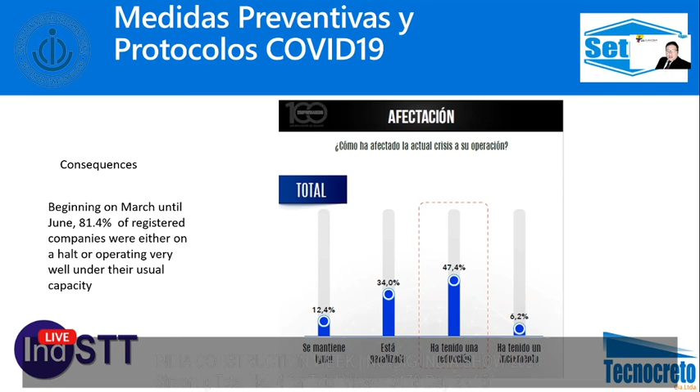In this chart, you can see how quarantine really began in March and moved forward all the way to June. We can see data showing that at least 80% of companies were not operational, or not operating at their normal capacity. Construction and service industries are the most affected sectors, especially those with less than 200 employees. This meant that too many businesses were dangerously at risk of closing down, and we needed to take action to adapt and survive.

Sales plummeted to under 40% for at least over half of the still active companies. Projections forecast that it would take around 4 months for companies to reestablish some ground and finally return to a usual level of activities.

It is clear now, around December, that this crisis still prevails and will continue for at least another 5 to 6 months ahead.

Once our government authorized some industry sectors to progressively reopen their activities under strict sanitary protocols, the construction sector was the first to be set in line for reactivation, when it began in July.

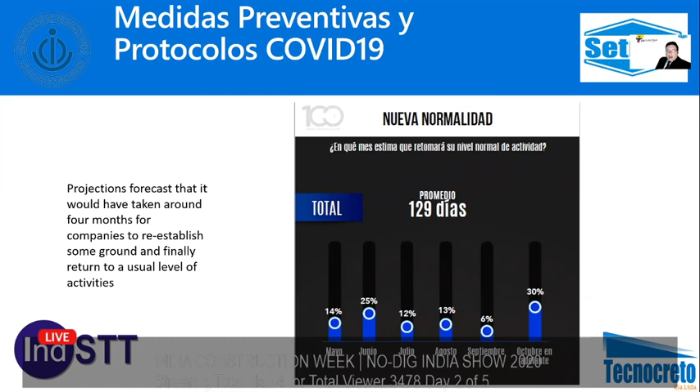With this, we began to think about what to do now. How are we going to achieve the objective of reactivating ourselves and maintaining some level of operations under this situation? Data was showing us that most companies didn't want to consider closing down as an option, and neither did we. Critical measures needed to be implemented, combined with administrative decisions based on government limitations.

Once again, data showed us that we needed to be resilient, adapting to the situation, redesigning ourselves, and in that way we might be able to resist this crisis.

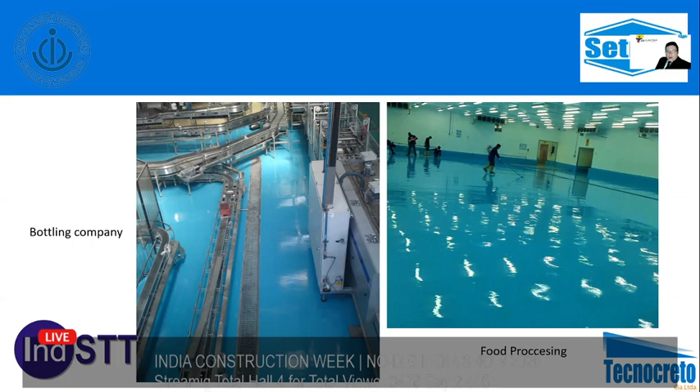Right here, we have a good look at what these industries might expect of properly protective concrete surfaces. All things considered, we at Setmix decided that the right approach might be to get to these industries and offer them protective coating systems that, when acquired, might lead to other needs such as concrete repair and concrete reinforcement.

Reasons for concrete protection we have as follows: protective lining or barrier coatings against chemical and mechanical deterioration, waterproofing, damp proofing, and freeze-thaw cycle protection, enhancing surface functionality, reflectivity, aesthetics, and thermal resistance or improved reflective properties.

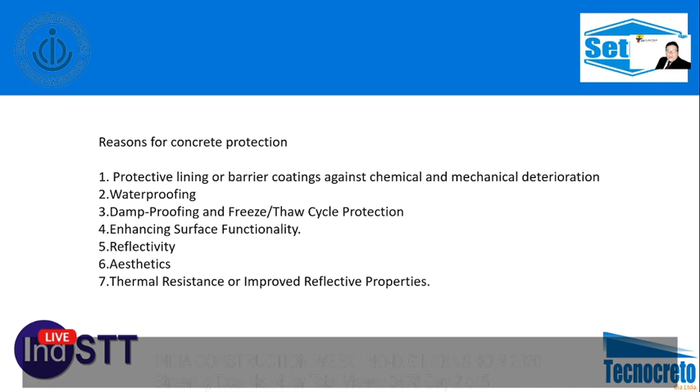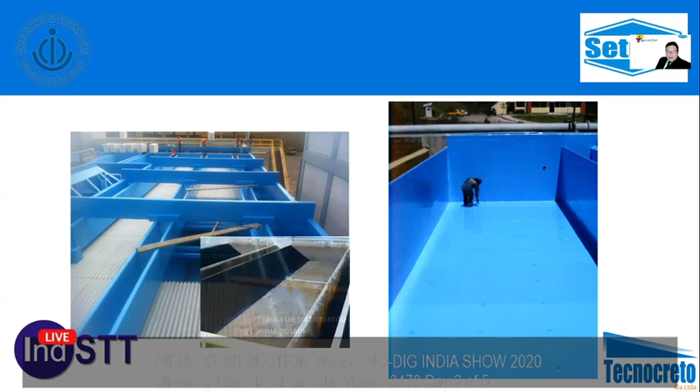As expected, once we offer the owner some concrete protection systems, the need to do some concrete repair and or reinforcement usually comes along. As you can see, when we finally apply coatings as shown here, there's usually also the need to do some previous repairs and in some cases, some reinforcement too.

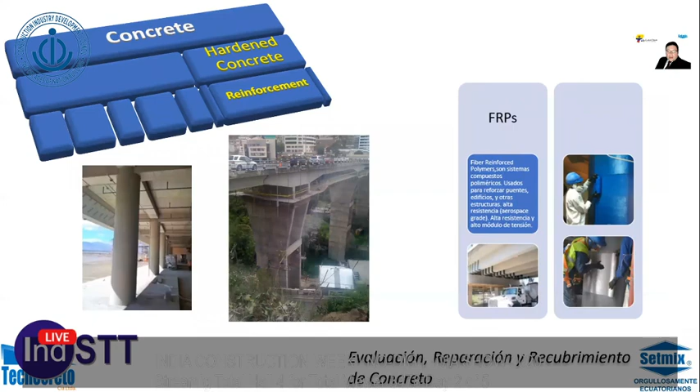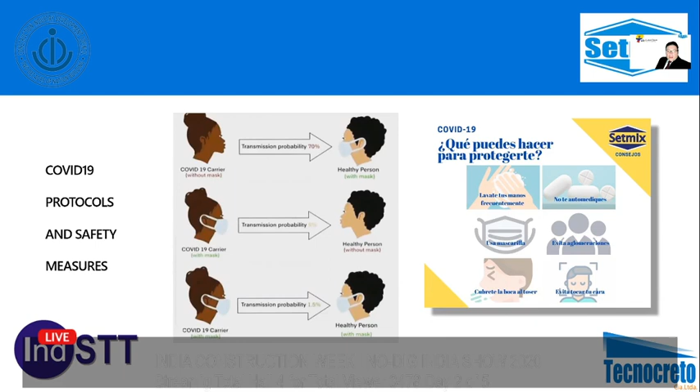One important thing to get this strategy started and running was to always reflect to our clients that we are consciously minded to follow safety protocols and keep everybody safe, healthy, and free of a COVID infection. We then resumed our activities right after finishing our requirements on training for our personnel on COVID safety protocols. We need to wear masks, wash our hands, avoid touching others, and avoid touching your own face. Keeping the recommended distance of 2 meters away should always be followed.

It was then that projects did finally begin as shown here at these client facilities, going through surface preparation, priming, repairs, joints, surfacing, and finally, top coat application.

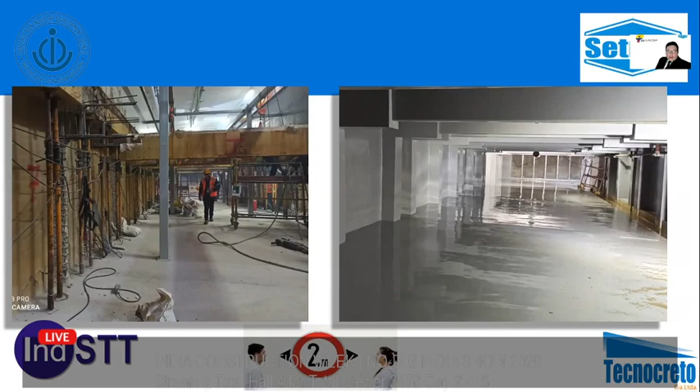Here is a list of some guides and standards that should be followed during the installation of protective coatings at any project to achieve best results.

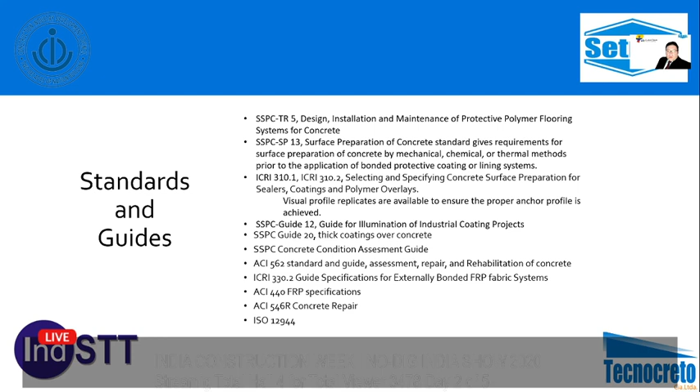Finally, keep in mind that there are two types of base specifications as a starting point. One is for new construction projects and the other for repair and maintenance of existing projects.

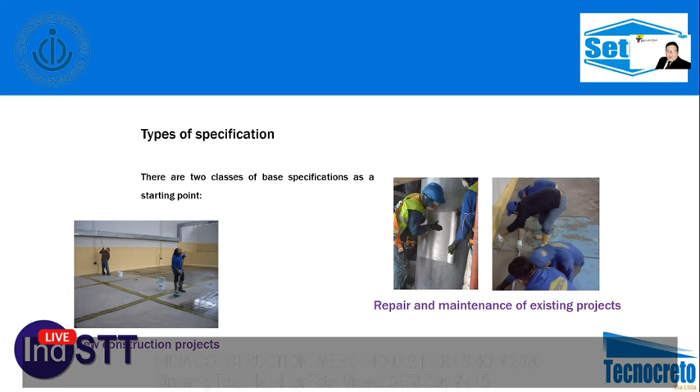To conclude, adequate system selection for concrete protection, as specified, shall be achieved by meeting technical requirements based on use, environment, and durability. The specification shall be created and designed by an experienced certified professional in coatings protection, and technical criteria shall always prevail over any sales point of view.

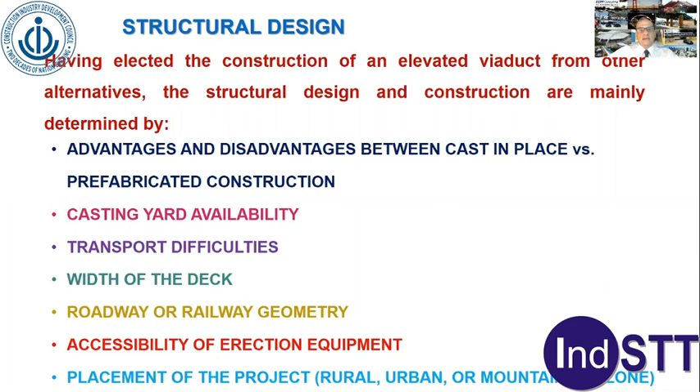Structural design. Having elected the construction of an elevated viaduct from other alternatives, the structural design and construction are mainly determined by advantages and disadvantages between casting in place versus prefabricated construction, casting yard availability, transport difficulties, width of the deck, roadway or railway geometry, accessibility of erection equipment, and placement of the project in rural, urban, or mountainous zones.

Piers and foundations. Piers, in general, rectangular or circular RC concrete columns, bents, RC or PT concrete caps, and two or more columns. Shallow foundations or group of piles, closed or open abutments.

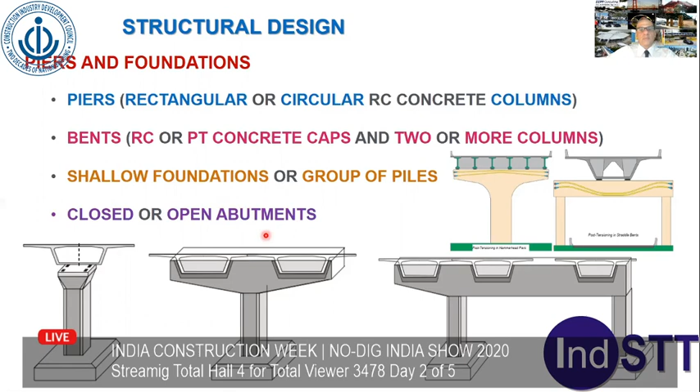Decks. Construction method. Between 30 meters up to 50 meters span length, precast systems, and between 70 meters up to 300 meters, cast in place methods. Static systems, continuous or simply supported. Main erection systems: full span, span by span, balanced cantilever, incremental launching, and progressive placement.

Main cross sections: U-girders, box girders, multiple I or U beams, plus cast in place or prefabricated deck slabs. Section depth, constant between 30 meters up to 60 meters span length, and variable between 70 meters up to 300 meters. Erection equipment: launching gantries, cranes, movable scaffolding, lifting frames, form travelers, and launching trusses.

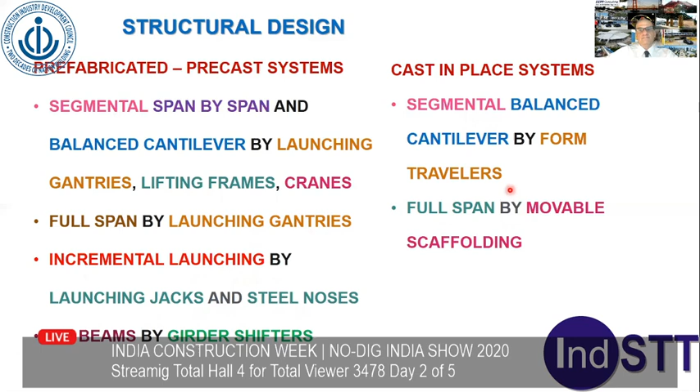Economical span length ranges for concrete bridges: slab or T up to 20 meters span length. I girders between 20 meters up to 50 meters. Incremental launching between 30 meters up to 60 meters.

Span by span system between 30 meters up to 50 meters. Balanced cantilever precast system between 40 meters up to 110 meters. And cast in place system between 70 meters up to 300 meters.

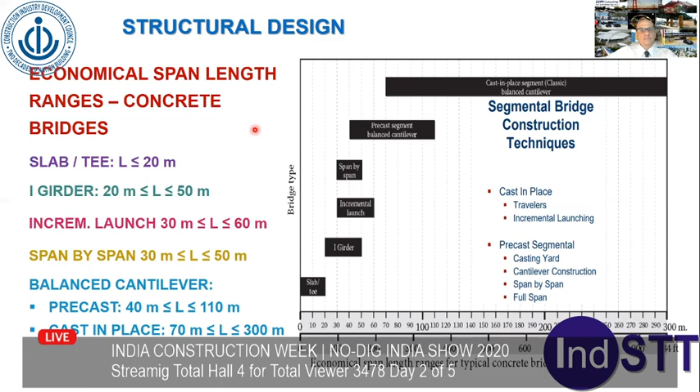Usual cross sections: unicellular box girder, U-girder in segments, U-beam plus cast in place or precast deck panels, and mixed concrete steel box girders plus cast in place slab or deck panels.

Composite action: single or double composite action.

Less usual cross sections: multicellular concrete box girders, all of this, when the width of the bridge needs to be high.

PT concrete box girder with corrugated or trusses steel webs: concrete upper slab, concrete bottom slab, and webs with corrugated steel or trusses.

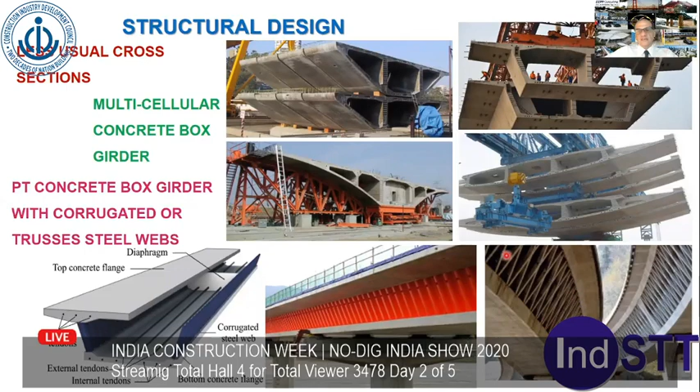Optimum span ranges for different cross sections for railway viaducts, ratios between span length and depth of the cross section: slabs, concrete box girders, mixed girders, steel sections, and simple or double mixed actions.

Cast in place concrete deck or prefabricated concrete deck, U-beams, and prefabricated decks or cast in place decks.

Some important details: balanced cantilever and continuity PT, shear keys, bottom continuity tendons, cantilever tendons, bottom PT bars, all of this for the cantilever system.

Span by span with external or mixed PT, mixed PT, external PT, for simple support or continuous systems.

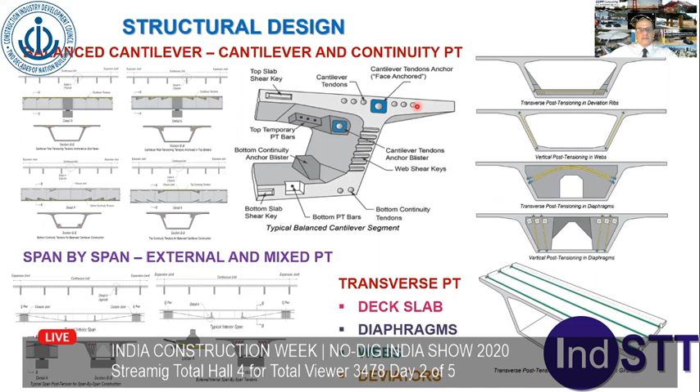And then transverse PT in deck slabs, diaphragms, webs, and deviators. These are the main construction details for balanced cantilever and span by span systems.

Construction: cast in place versus prefabrication. Precast segment erection: balanced cantilever erection with launching gantries, span by span erection with launching gantry, balanced cantilever erection with lifting frames, balanced cantilever erection with cranes, precast beam method, full span precast method, span by span erection on false works, and in situ construction: incremental launching and form traveler method.

Precast segments, launching gantry. Span by span with launching gantries, span length between 30 meters up to 50 meters.

Balanced cantilever with launching gantries. Segments, balanced cantilever, launching gantry, span length between 40 meters up to 110 meters.

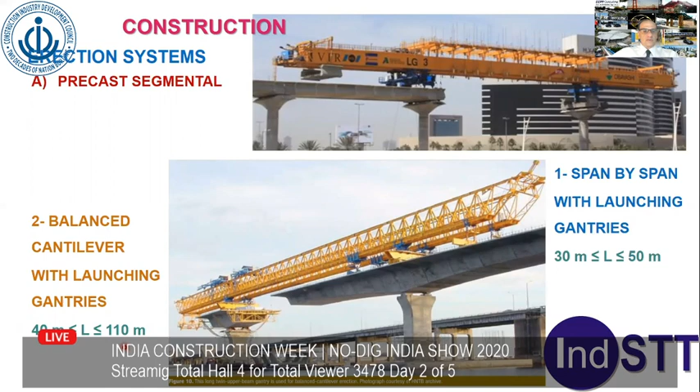Incremental launching with launching jacks and steel nose, span length between 30 meters up to 60 meters. And progressive placement of segments with cable stay system or temporary piers. All of them are segmental systems.

Precast full span with launching gantries, span length between 20 meters up to 50 meters. U-girders, box girders.

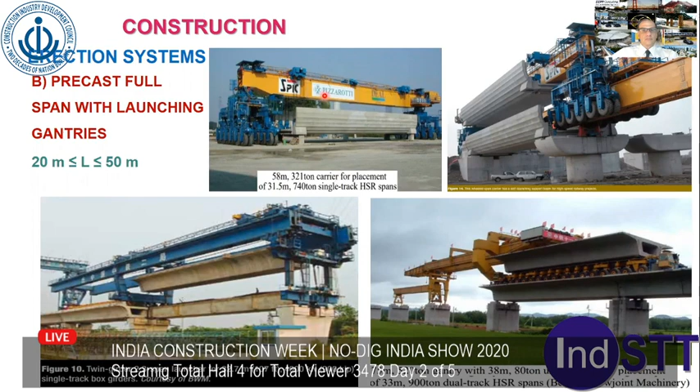Cast in place segmental with form travelers, usually used in balanced cantilever method, between 70 meters up to 300 meters span length.

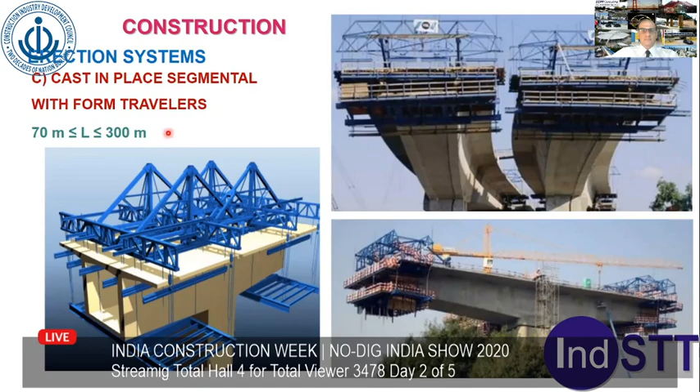Cast in place full span with movable scaffolding system, this machine. This overhead girder holds the scaffolding system, between 20 meters up to 70 meters span length.

Single beams, precast single beams, A and U, with girder shifter, the girder, and then cast in place slabs or precast deck panels, between 20 meters up to 50 meters span length. This girder can shift the beams.

Construction cycles, main erection methods. It is very important to estimate the construction cycle of a single span in order to determine the needs of the storage yard, precast construction buildings, and number of molds.

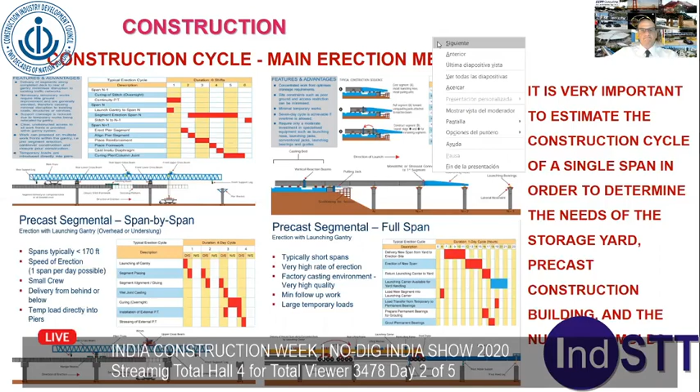Construction facilities and equipment: precasting yard, segment transporter between the precasting yard to the bridge, to the placement of the bridge, precast construction building, segment and molds, and lifting frames to transport segments into the precasting yard. All of these are construction facilities and equipment.

Full span molds, U section, and box girder section.

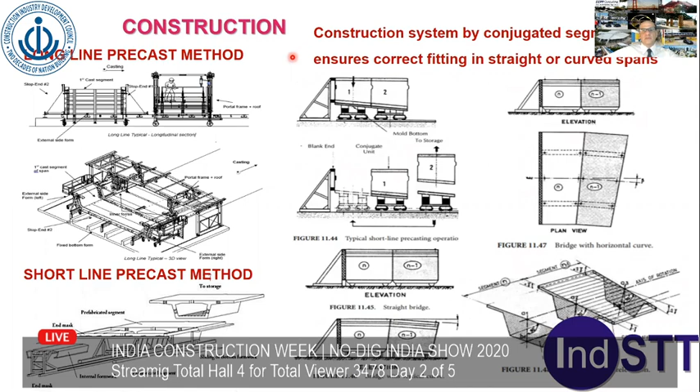Long line and short line precast method. Construction system by conjugated segments that ensure correct fitting in straight or curved spans during the erection.

Main erection equipment: launching gantry for span by span, launching gantry for full span, cast in place full span with movable scaffolding, cast in place segmental with form travelers, and incremental launching with launching jacks and steel noses. These are the main erection equipment and systems.

Accelerated bridge construction, based in prefabricated bridge elements and systems. Easy transport and fast erection. Improve in place construction, total construction time, and public security. And reduce traffic perturbation, in place construction time, and climatic issues. This method, in my opinion, is very important for the post-COVID era.

Prefabricate foundations, prefabricate columns, prefabricate segmental columns, bent caps, walls for abutments, caps for abutments, in place connections. All of these are prefabricated bridge elements that should be connected in place.

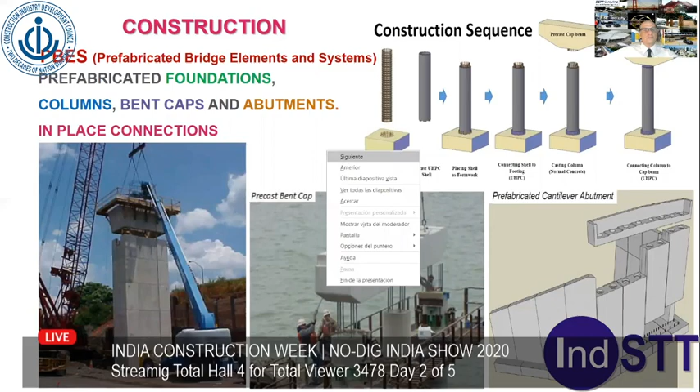Seismic PBES connections, energy dissipating connections, ultra high performance concrete, super elastic shape memory alloy, and self-centered columns in order to achieve the performance-based damage states.

In place connections, mechanical bar connections, grouted ducts, pocket connections, socket connections, and two-stage integral pier cap. All of these are in place connections of the PBES.

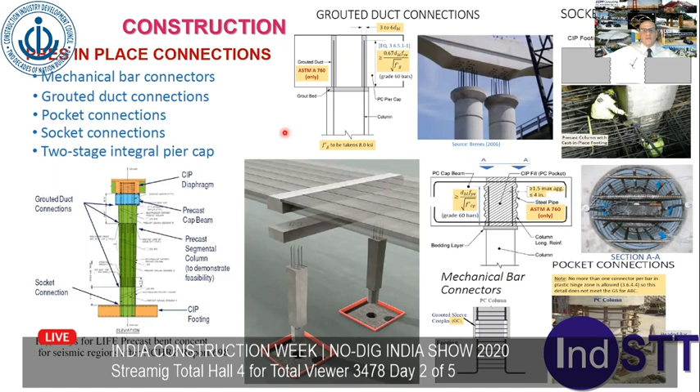And finally, precast decks. Full or partial depth concrete panels connected to PT concrete or steel beams.

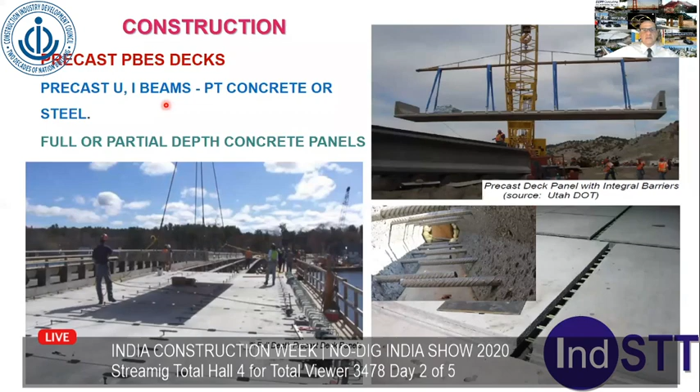Now I want to show you two viaducts constructed in Buenos Aires. The first one is called Mitre. It is a 4-kilometer length viaduct. The erection system was span by span. It's a railway viaduct. The section is a box girder, a concrete box girder with external and mixed PT.

The second one is a 5-kilometer viaduct in Buenos Aires too. It's a railway viaduct too, called San Martin. In this case, the erection system was full span. It is a concrete box girder with internal PT.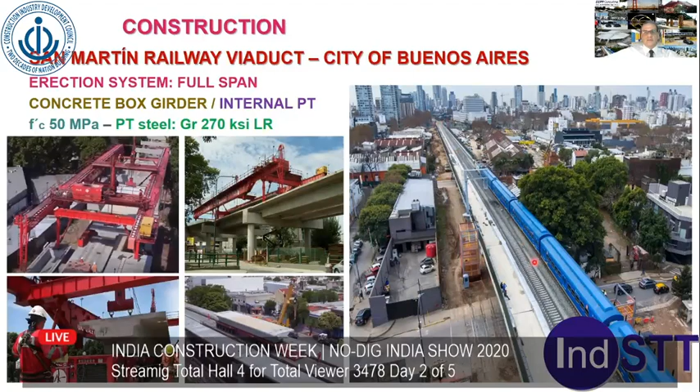Improving construction practices, processes, and guidelines in a post-COVID world. Conclusions and opinions: new bridge and viaduct constructions and retrofitting of existing structures are highly relevant activities in public works all around the world. In many countries, the public work construction industry can quickly help to reactivate their economies. To achieve this objective, the sources of financing through multilateral credit and development banks, fundamentally in developing countries, is a crucial issue.

These important infrastructure projects employ a large number of people: project, production, and management, architects and engineers, suppliers, construction workers, administrative staff, etc. The ABC method of bridge construction can be a valuable tool in safety and overall care within the construction industry.

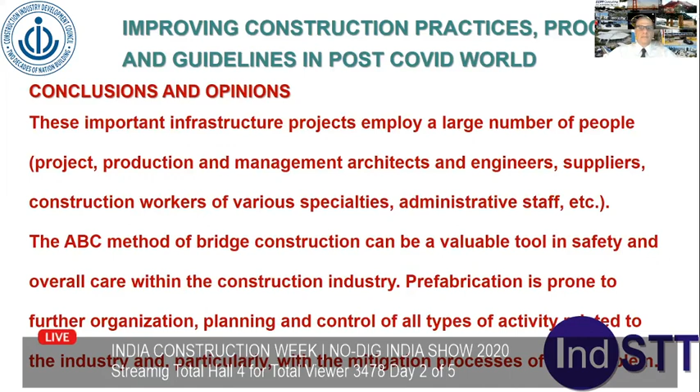Prefabrication is prone to further organization, planning, and control of all types of activity related to the industry, particularly with the mitigation process of this problem. In addition, the work in place in systematized processes, basically of transportation and assembly of precast elements, are also prone to being able to comply with the OSHA recommendations.

These systematized construction processes, in general, have greater facility in feasibility and financing analysis, along with compliance of the budget with limited deviations. This premise can mitigate the great risks and challenges posed by the post-COVID era.

Maintenance and management of workforces, human resources, financial sources and financial health of the construction companies, recovery and stabilization of the supply chain, improvement of safety and overall care within workplaces.

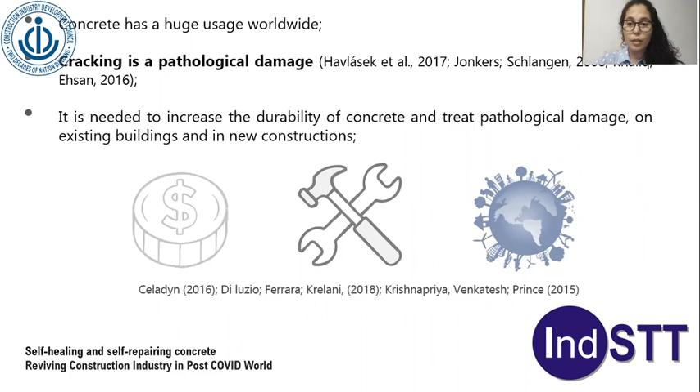I'm here to present the work on self-healing and self-repairing concrete. We know that concrete has huge use worldwide, and cracking is a pathological damage that may lead to severe deterioration. So there's a need to increase durability so we can save money, we don't need to do reworks, and so that structures can become sustainable.

Studies of mechanisms that can act on concrete, creating products that can heal the cracks, lead us to the knowledge of self-healing and self-repairing concrete. They are divided because self-healing is considered as any process carried out by the material itself that involves the recovery and improvement in the performance of material that has been damaged by any previous process. Self-repairing is limited to the closure of the crack, and doesn't involve properties such as physical or mechanical.

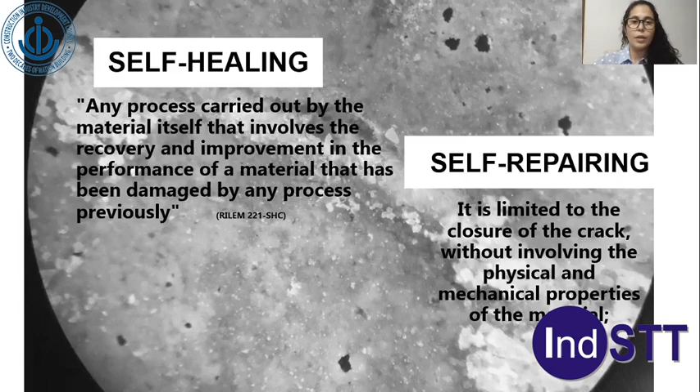We have self-healing mechanisms that are autogenic or autonomous. From autogenic, we have materials already used in concrete, such as cement or pozzolanic materials. For autonomous, we put some material in concrete only to have this healing capability, such as chemical compounds or bio solutions. So this classification is based on the materials needed for the process.

We know that mechanisms have requirements to occur. There's a need to evaluate if they can work on real structures or real exposure conditions. We know there's an influence of curing condition, and it's also necessary to analyze the reliability and whether the mechanism can work in multiple cracking. Different mechanisms have different maximum thicknesses in which they can work.

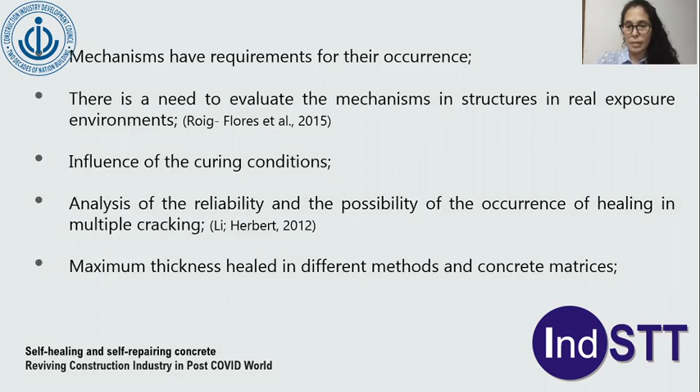Self-healing mechanism: we have autogenic by cement consumption. We have two options: hydration of non-hydrated cement particles, and dissolution and carbonation of calcium hydroxide. This mechanism is influenced by water, crack age, crack width, and cement consumption.

We also have the autogenic by the use of pozzolans. They react with calcium hydroxide and water, and they promote the CSH. This is related to cracking at early ages, when we still have pozzolanic reactions occurring.

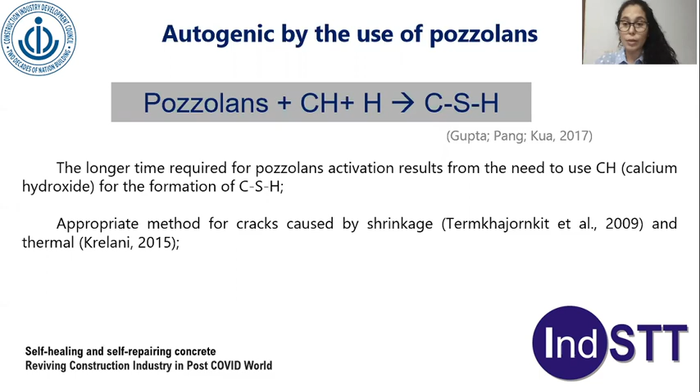We can also have the autonomous by bacterial solution. It works similarly to human body healing, like blood clotting and bone recovery. Related to the bacterial solution, the process that usually occurs is the carbonation of CH and the reaction with bacterial solution. We have to choose the bacteria, and in Brazil we have the Bacillus subtilis AP91, which is proven to produce carbonate, so it can be used for concrete biocementation.

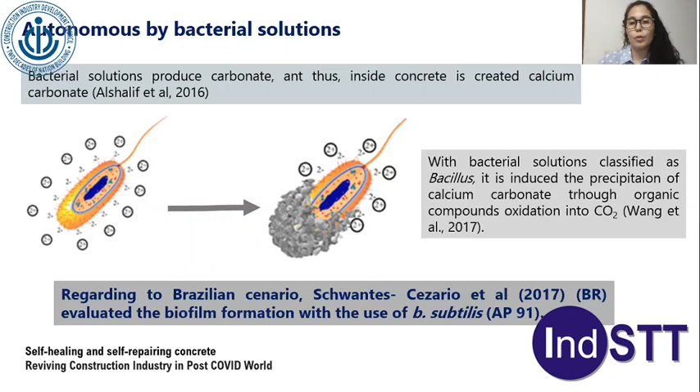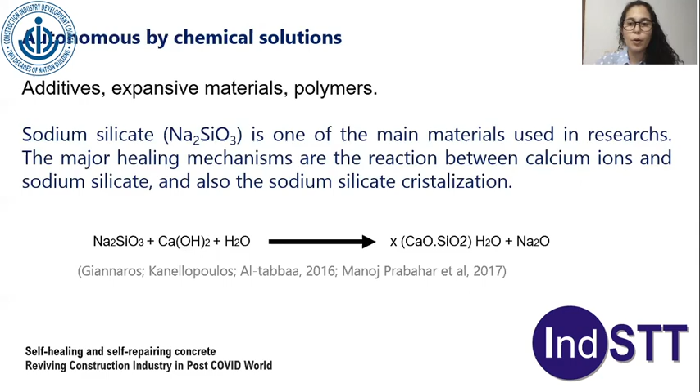We also have the option to use chemical solutions that are usually commercialized ready for use, such as sodium silicate. It also reacts with cement compounds and can also promote the CSH.

To use bacterial solutions and chemical solutions, we have the option to use capsules to hold these materials, such as expanded clay or expanded perlite. This study compares those two aggregates, and they discovered that perlite works well for healing, for example. We also have the option to use or not use a vacuum chamber to put the materials inside those capsules.

Some authors pointed out conditions related to the environment where the structure is, and the cure. Song et al. pointed out that marine environment works well for the healing. Palin, Wiktor, and Jonkers cured samples in marine water and potable water, and they discovered that marine water works better.

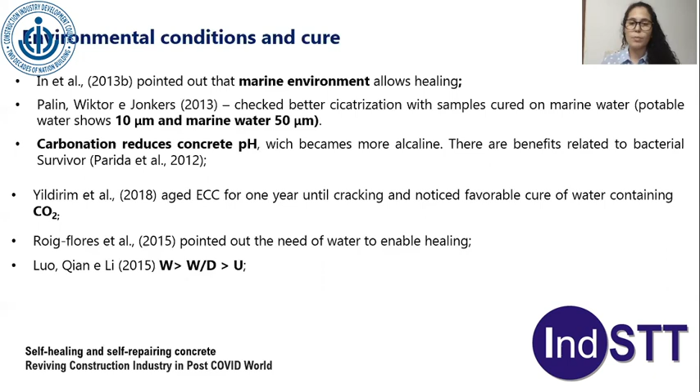We have procedures for concrete cracking, such as adding materials in the fresh state, putting samples in a stove to cause crack formation by heat, cutting the samples, or doing a deflection test. Also, to check if the healing and repairing is working, we use chemical, physical, and image analysis.

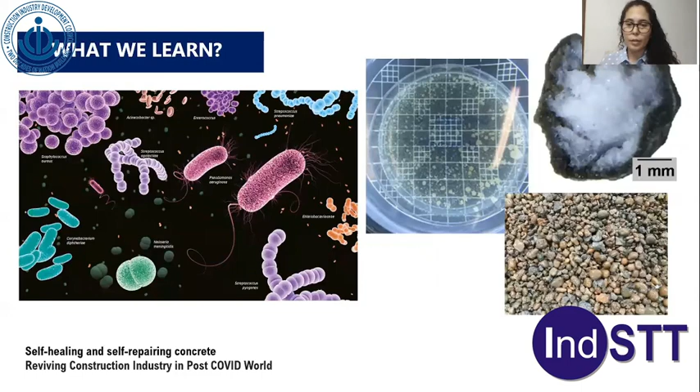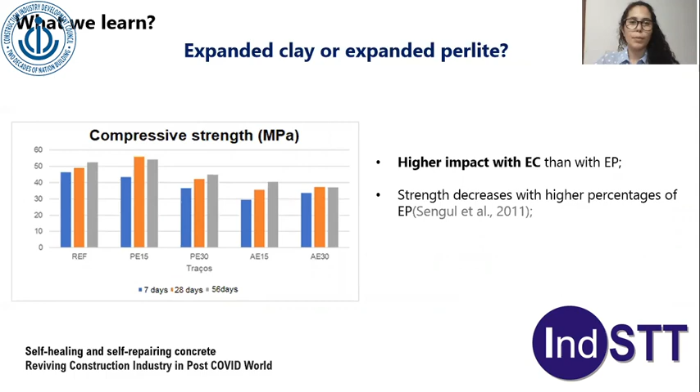What we learned in my research group here in Brazil: first, we were comparing expanded clay and expanded perlite from Brazil, and we checked by SEM analysis that expanded perlite has much more voids, so it may be good to hold the chemical and bio solution. Also, there's a higher impact when we use expanded clay than expanded perlite, so expanded perlite may be better to not damage the concrete properties.

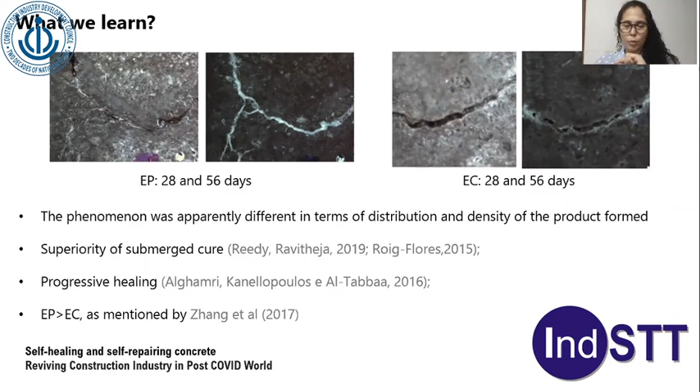Also, by view analysis under microscopy, we checked that expanded perlite is better at conducting continuous healing inside the crack.

We have to choose the bacteria, and also we have to obtain the bacteria development curve, so we can choose the solution that we are using in every sample. We know that there's an influence of bacterial solution on the capability to produce calcium carbonate, for example.

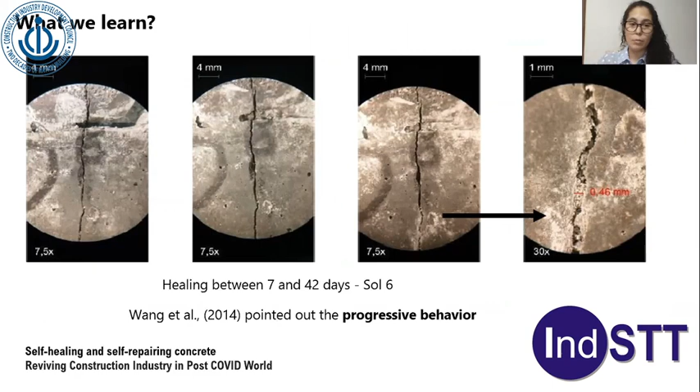So we checked the solutions with concentrations of 6, 7, and 8 UFC per ml. With solution 6, we found progressive behavior, and it was able to heal cracks of 0.46 millimeters. With solution 7, the product was only formed on the crack perimeter, with values of 0.22. And with solution 8, the product was inside the crack and on the surface, with a maximum value of 0.19. There are different mechanisms.

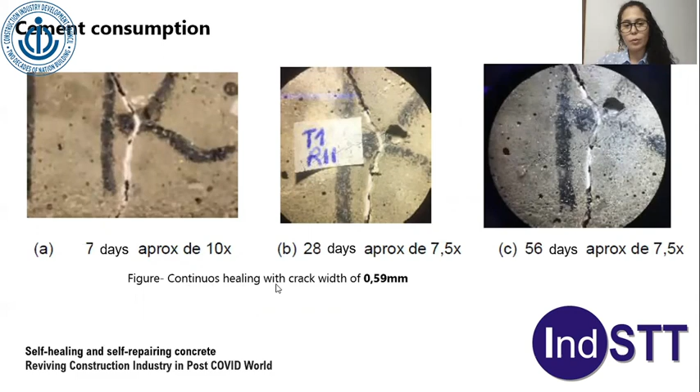We have environmental impact and healing capability to be analyzed. So we did a huge experimental procedure, analyzing cement consumption, for example, and it was able to promote continuous healing with a crack of 0.59 millimeters. We also evaluated superficial irregularity. It was good to form the product because of the continuous presence of water, and the size was 1.2 millimeters, which is really good, being above 1 millimeter. That's usually what we have in bibliography.

We did the XRD analysis and checked that there's C-A-S-H, C-S-H, and calcium carbonate. Also, the shape is okay with what was expected.

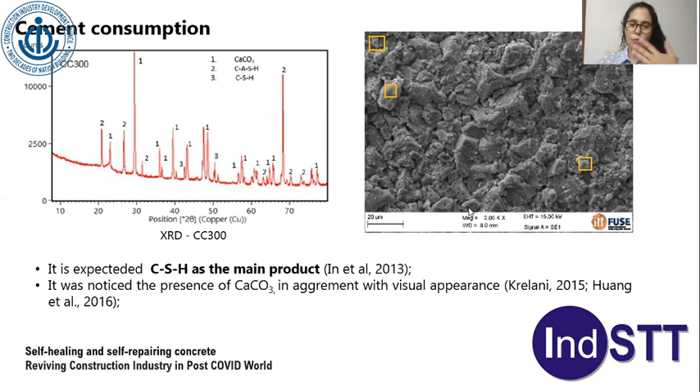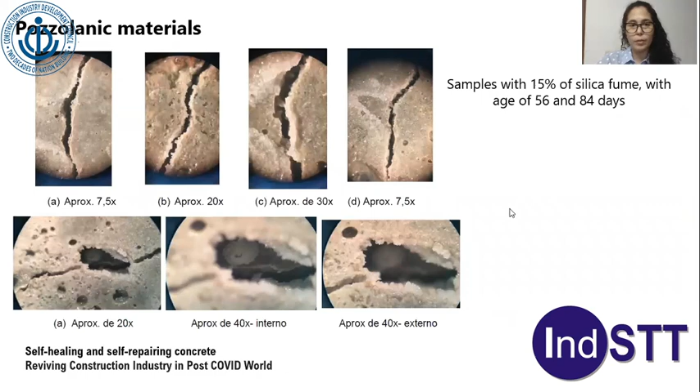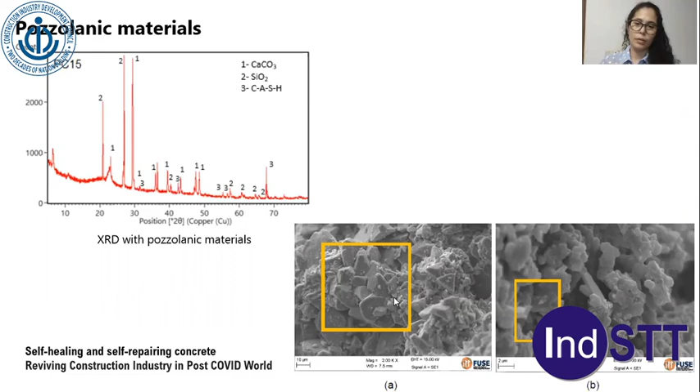With pozzolanic materials, we checked that the product was mainly formed only on the crack perimeter, with a width of usually 1 millimeter. We have samples with 7.5% silica fume and 15% silica fume replacing cement, and we checked the crystals forming on the crack perimeter. We see almost the same materials from the other mechanism, and we have those products as layers from SEM analysis.

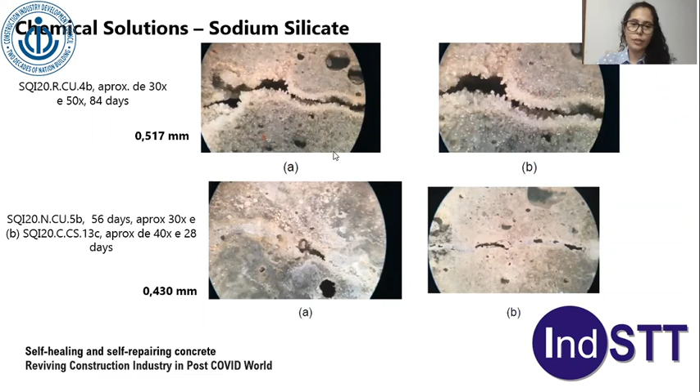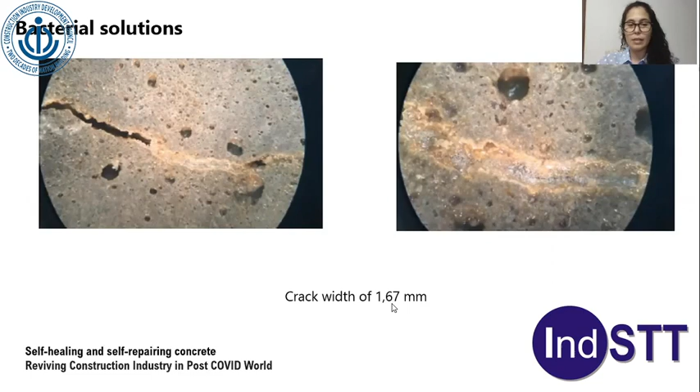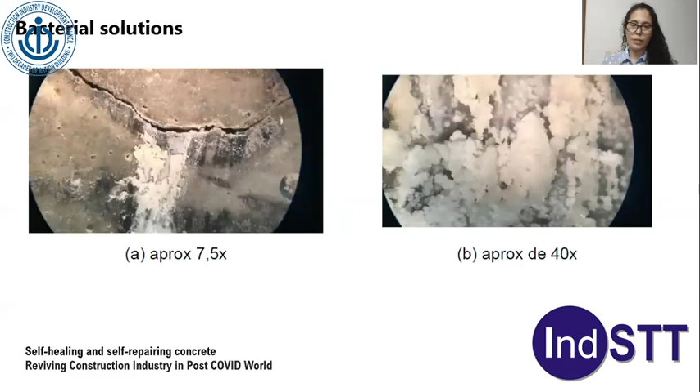From bacterial solutions, we have the crack completely healed with 1.67 millimeters, and we also have inside the crack continuous healing from small cracking and bigger cracking. Here inside the crack there's a solid material in all the continuous crack. And here there's a common occurrence that material is not only inside the crack, but also on the surface of the samples. We can check those phenomena. And here we find calcium carbonate, silicon oxide, CSH, and organic material.

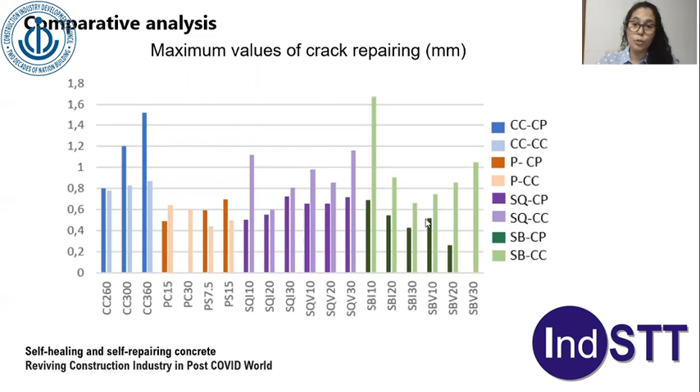When we check the median values for crack repair, we may think that cement consumption was the best option, which is not true, because there are just a few occurrences. That's why the median value is bigger than in the others. We can see good behavior from chemical and bacterial solutions. And for the maximum values, we reach values above 1.6 millimeters for bacterial solution, which is really good considering the real cracks in structures.

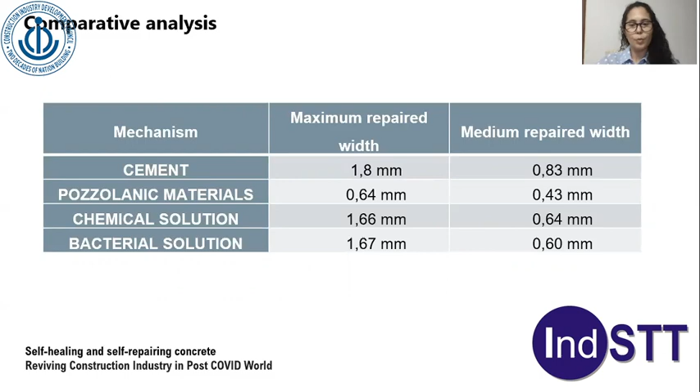This is the data that we obtained in this research, and I will be glad to share it with you if you have interest. To finalize, we analyzed the cure condition, and we checked that submerged is better than only wet for cement, pozzolanic, chemical, and biological solutions. So maybe that's a condition for self-healing to occur.

AAI is constructing, operating and maintaining world-class airports. Along with that, AAI has a side that's down to earth and close to the people. That's clearly visible in its CSR programs and activities. Through its CSR activities, AAI has keenly focused on skill development to generate livelihood opportunities in remote areas.

AAI has tied up with the Construction Industry Development Council for skill development of unemployed people belonging to economically weaker sections. In the construction industry there is a huge shortage of manpower. At the same time there is unemployed youth. So if we provide them training, it will be a win-win situation for both.

Through this skill development training, students get theoretical and practical knowledge in construction-related trades like electrical wireman, general work supervisor, site accountant, and storekeeper, etc. We are providing training to unskilled youth who are unemployed. We distribute pamphlets at different locations in UP, Bihar, and West Bengal to reach unskilled manpower, so we can make them skilled. We provide them 3 months of training. More than 5,000 students have been trained in this skill development program since 2015.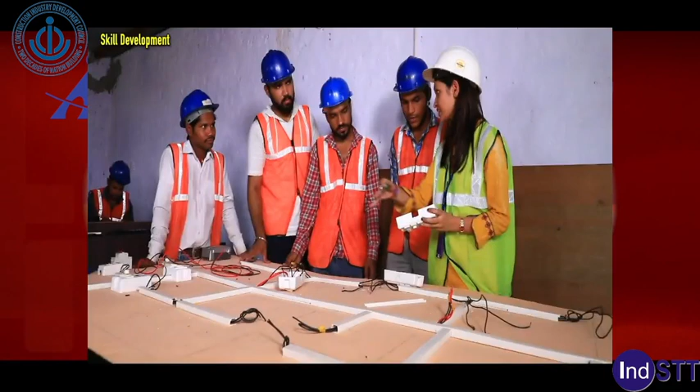The student gets theoretical and practical knowledge in construction-related subjects like land survey, electrical wireman, general work supervisor, site accountant, and storekeeper, etc.

I belong to Risu, Meghalaya. I passed 10th class. My father is a farmer. He earns just rupees 300 daily for the family. It is not sufficient. I heard about this training.

More than 5,000 students have been trained in this skill development training program since 2015.

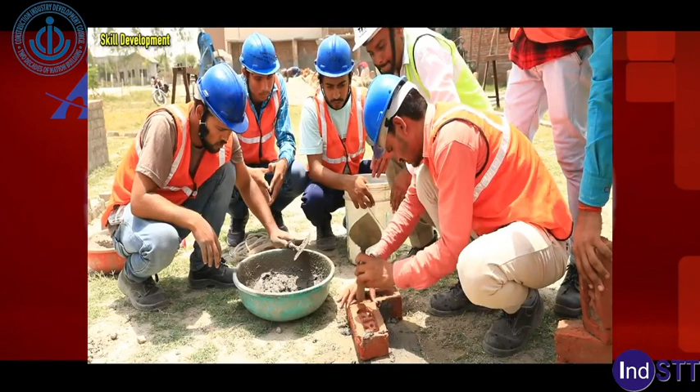I learned about foundation, cement, chain, etc. By taking this training, I can make my future better. Thanks a lot to CIDC.

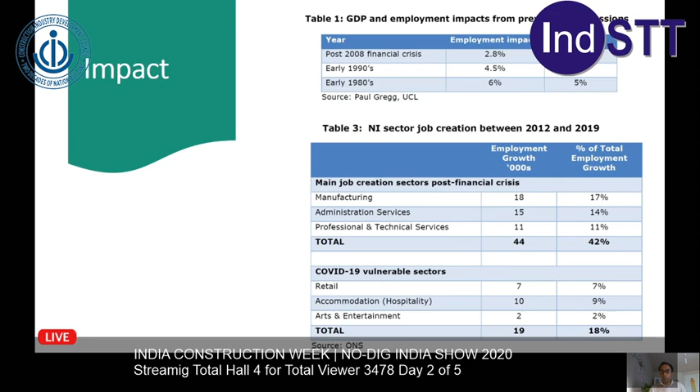But if you look at COVID's vulnerable sectors, those are different sectors—retail, accommodation, and entertainment. So it's a different sector that's already been affected. The manufacturing sector was already struggling to recruit enough skilled people before COVID, so this vulnerability might present itself as an opportunity if you're able to create a good pathway for it. That pathway would be to take some of these people and reskill or retrain them to attach themselves to other sectors offering jobs. It's not a universal scheme, but it will help move a large mass of people out of unemployment.

Looking at the pathway to recovery, Ulster University estimates it'll take 3 years on a normal upper recovery rate and 4 years on a lower recovery rate. So a good estimate is 3 to 4 years for us to get out of the economic slump caused by COVID. That gives you a rough idea of where we are.

Now I'm going to look at 4 examples of how innovation can help companies embed a bit of resilience in them and create a bit of stability in their local market.

So 4 examples. The first example is very simple: self-compacting concrete and fair face concrete. Self-compacting concrete is a global research area that started in the 1980s in Japan and then slowly filtered down. It eventually came to our companies, our researchers started it, and then our companies started it, but it took a long time to diffuse that idea into the industry.

So 2015 is when we estimated it had completely penetrated the market in our case. For those who understand self-compacting concrete, it's a way the concrete flows around the different complexities within the concrete. If you have a very congested steel reinforcement cage, it can flow around it and reach a lot more complicated places.

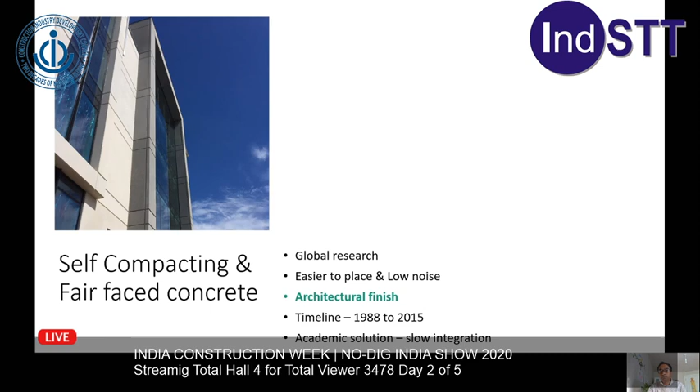How did that help the industry? From 2008 to 2010, we estimated what it meant to these companies, because they were working with us and we had the figures with them. So just for these 5 companies, there was this much amount of money saved annually over the 2-year period. Now we have about 45 to 50 companies in this region, so you can imagine what the impact would have been, and also the global impact for all other companies around the world.

But the one thing to remember is this is an academic solution - it took time to integrate. But it gives visibility to all the companies in the region. A good product range can be brought out in whatever shape or size that may be.

You can see some of the products here. They were able to create such large curvature material, make it here and transport it across, and that feature, the finish and the detail - everything was possible.

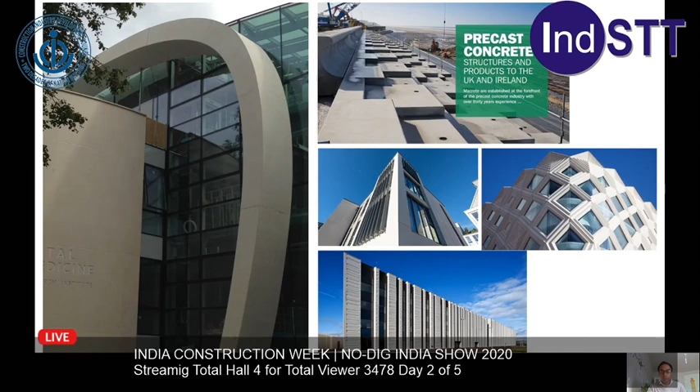Some of the examples at the bottom are from a company called Techrete. They're based in the Republic of Ireland, and they make architectural facades - fantastic products. So it gives you an idea that they were able to capture the market, enter the market with new products, and enter the market meeting requirements from architects. That freedom is what this innovation meant for them.

The next innovation I'm talking about is a university-based innovation, but it changed a lot of people's lives. This is called arching action - a very simple concept. If you have two beams and a slab sitting on the two beams, a vertical flexural load on it will be transferred to the two beams through what's called an internal arch. The deeper the slab, the more effective the arch would be. This means that without quite heavy flexural reinforcement, the slab will be able to carry the load.

That single simple concept meant that people like London Underground, who were reevaluating their platforms, were able to keep those platforms alive for a lot longer, and they saved 80 million by the estimate in 2008 alone.

I would have used this arching action in deck slabs in bridges that we assess. That means if you have corroded reinforcement in the deck slab, and there are two beams supporting it with sufficient thickness, you can use this design manual for roads and bridges, which is a public document, to estimate how much arching action will be there, and therefore whether reinforcement is required or not.

That meant a lot. By 1980, the idea had evolved. It was made into a public document in 2002 - took 20 years. And then by 2010, it had penetrated the market. It's an academic solution that took a slow rate of integration, but it saves a lot of money worldwide. It's a public document, which means everybody can use it. So this is the second example.

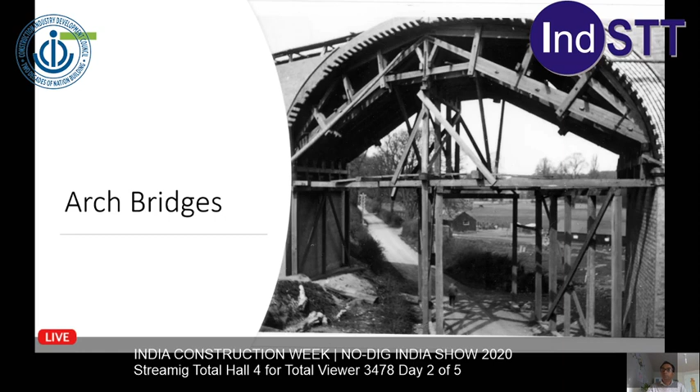Professor Adrian Long, the person I initially mentioned, created a new form in which the arch can be made. He made these voussoirs, basically precast concrete units of a certain trapezoidal shape, depending on length and span, put a polymer reinforcement on the top, and lifted them. When you lift them, it forms the arch, and once it sits in place, it does not need any reinforcement. Therefore, it's just a compressive stone, with all the benefits of a stone arch.

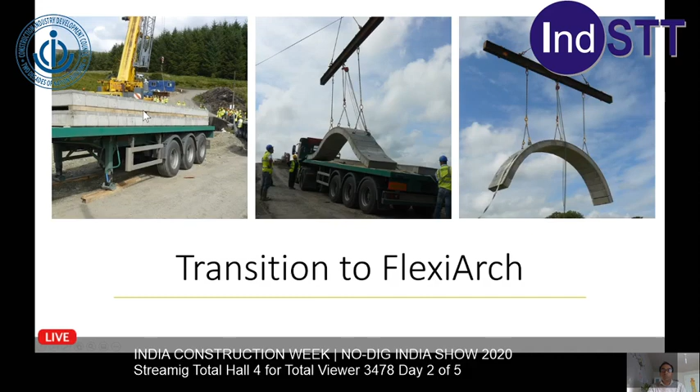But the best part is it can be transported to site flat-packed, so several of these arches can be brought in a big articulated lorry. The idea was invented in 1994. It took a while before it was rolled out, and the first idea was patented in 2004, working with a company called Macrete.

But let's talk about what it meant to Macrete financially and project-wise. FlexiArch won about 10 different industrial awards, which gave Macrete visibility in the GB market. You're a tiny company in the big land of Great Britain, and you need that visibility to show you're an innovator, a creator, a new product producer. That visibility meant a lot for Macrete.

They were able to sustain themselves during the worst of the 2008 to 2015 period. They were able to create new products, and they were able to get a lot of allied work. That's what it meant to Macrete—it helped them in a large way.

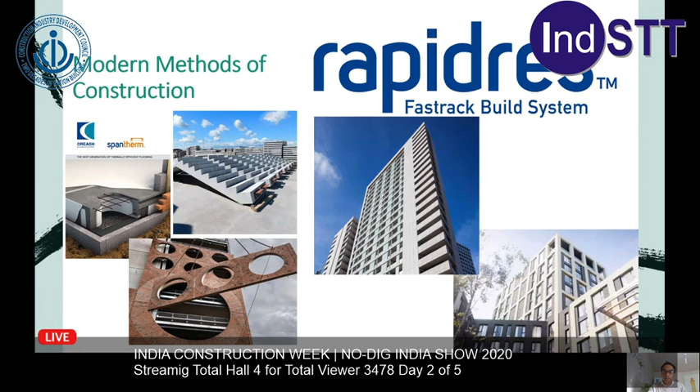But what it meant to Creagh is that it gave them a new pathway, a new product range, things that can be delivered on site really fast, with any sort of facade finish possible. And they were not just the supplier—they were now the supplier/contractor. So they had a larger share of the pie, a larger input into the projects, and were not forced into the project by others.

At that time, they had to lay off a lot of people. They lost a few of their projects, as well as a lot of their staff, from 600 to 400. It was at that very difficult time they decided we need to create something new.

And they did. In 2014, they rolled out their first RapidRes. It was a heavy going project for them, but what it meant is they were able to pull themselves out of the losses. They were able to increase their turnover sustainably to a point that their turnover last year, 2019, is close to £100 million, of which 25% is from RapidRes - that's £25 million from RapidRes. They're starting to reinvest a lot in their product.

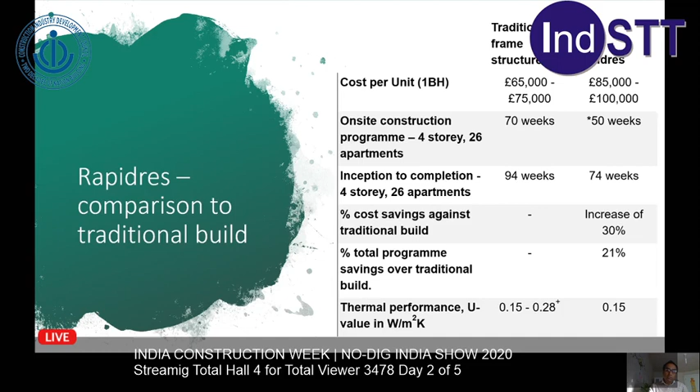So this is what RapidRes meant to Creagh. That's a fourth example. In this fourth example, you looked at different models of innovation - companies innovating things, universities innovating things, slowly moving to companies, all of them. They all have different paths for economic and social impact. But all of that meant the allied companies were able to create new product ranges, differentiate themselves from their competition, and create resilience in their systems that they can survive one recession to the next.

This kind of model is supported by our governmental body called Invest Northern Ireland, which funds the industry in doing research. There are different ways that they fund, from simple innovation vouchers, which is £5,000, all the way to nearly £1 million, but they only fund a certain part of it - they don't fund all of it. So they take innovation from the small seed examples to bigger things.

One of the biggest flagship programs is called KTP. It's a partnership where you have the academia, the industry, and the government body coming together to create funding for one research associate, a person, to be embedded in the industry but trained by the university. There's a lot of funding stream for that person to be upskilled. And 95% of the time, the company absorbs the associate, and the associate will actually grow up in the company really fast - that's what we have seen.